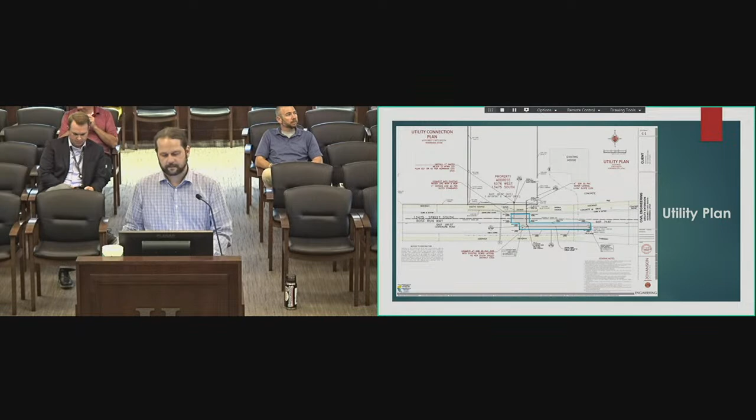The reason behind this request for the extension is due to some unforeseen costs for improvements that have to be done before South Valley Sewer will actually sign off on the plat. So the applicant's asking for an extension of time so they can save up for that money. That being said, staff does recommend approval of the subdivision extension request with the following conditions.

Great, makes sense. Any questions? Nope. For Sheldon or the applicant, if you have any questions, they're here. We will go ahead, if the applicant wants to come forward, provide any additional information. Seems pretty straightforward, but that's fine.

Any discussion from Planning Commission? Seems pretty straightforward. I'm ready to make a motion to approve item 4.1 with staff's recommendation. We have a motion by Adam and a second by Jackson.

We'll go ahead and do a roll call vote. We'll start with Forrest, yes. Daryl, yes. Heather, yes. Jackson, yes. Adam, yes. Preston, yes. All right, that motion passes. Thank you so much for being here.

All right, we'll move on to item 4.2. Good evening, and thank you again. This is a continuation of a commercial development project that the Planning Commission has reviewed previously.

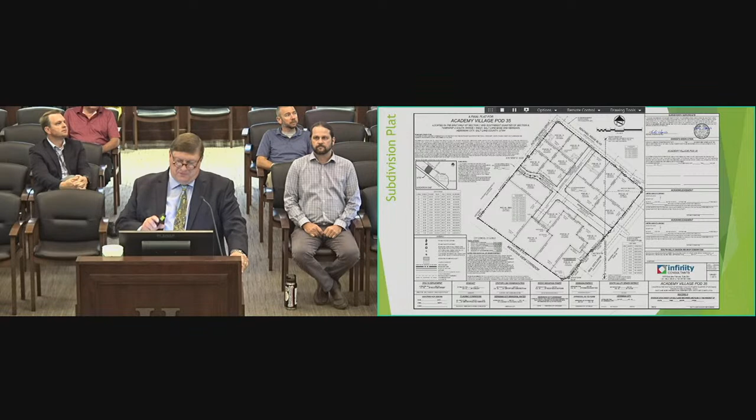As per a prior condition of approval by the Planning Commission, the final building elevations and landscape plan for this project was required to be presented back to the Planning Commission. This is the general location of this project, the subdivision plat that was approved for this area. We're now looking at pods A, B, C, and D in the top corner of this screen.

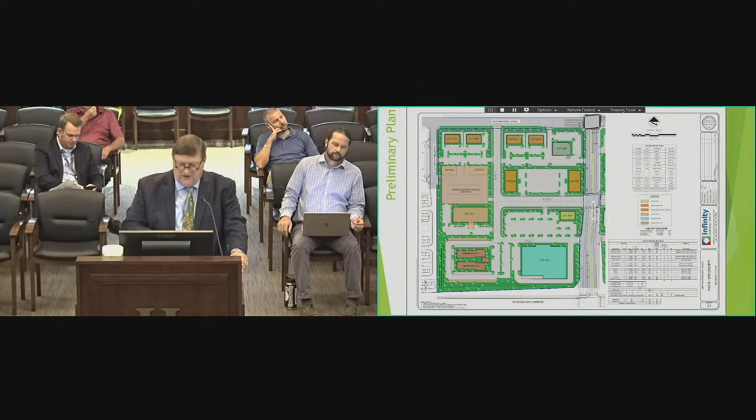Again, this is a commercial project. This was a preliminary plan that does show some residential down here in the corner. As you know, this residential project changed over time, but is still planned for that location. This was the amended plan approved by the Planning Commission. Again, in the upper left-hand corner, you're still seeing pads A, B, C, and D. This is the area we're looking at tonight.

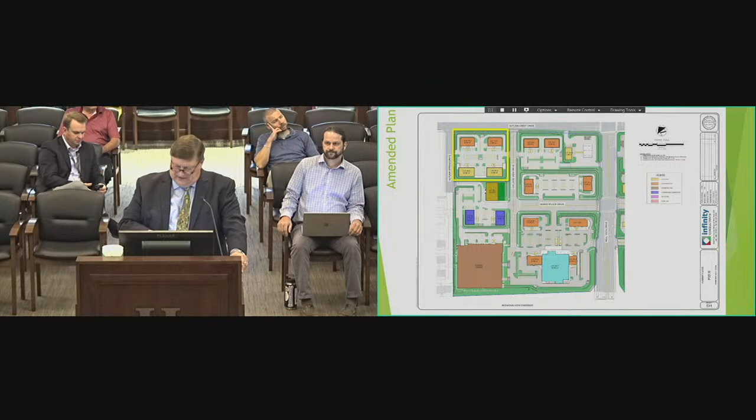In this proposal, currently the plan is to, on pad D, just do parking on that site, which is acceptable and still consistent with the approval of the city. We could potentially see a future pad there, but for right now, the idea is to provide that parking.

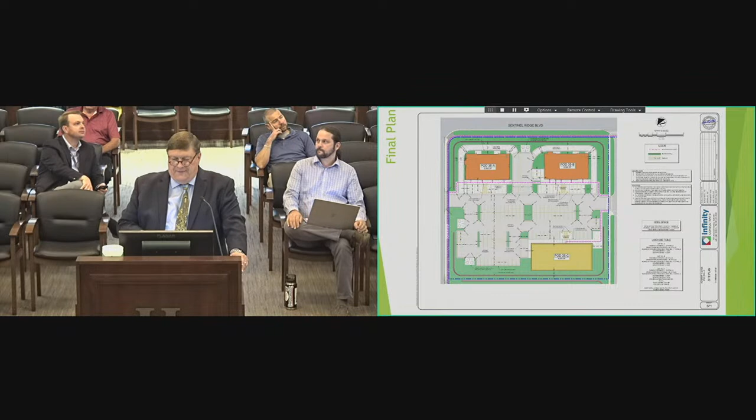Staff has reviewed the landscape plan. It's consistent with the other plans we've been seeing going to the center, as well as the building elevations. I've included all of these, but I'm just going to flow through them quickly. I wanted to have them in case there was any particular question. But again, these are very consistent. You're seeing just variations on the awnings and the combination of materials within the center. And then, of course, all the signage is done separately for each of these tenants as they come in.

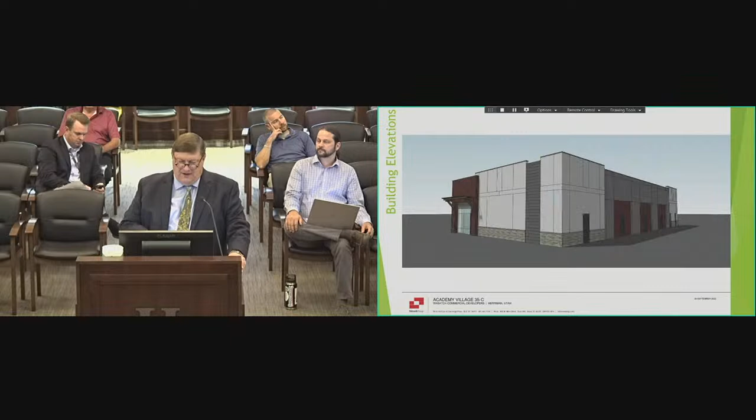The applicant is here online tonight if you do have any questions for them.

We do want to have just a landscape summary table added to their landscape plan. It just makes it easier when we have to do a final inspection; we can go out and simply count all the plants and the types and everything. And also, as the developer has been getting specific users within the center, we had recommended as a condition that we simply update the parking information, the parking plan, to reflect those known and intended uses in Pod 35, just to make sure we're staying in compliance with the overall conditions of approval.

So that was staff's recommendation. I don't know if you have any questions for the applicant tonight.

Maybe one quick question, even for staff: when they do decide to build a fourth pad there with that building, I guess they'll still have to come back to us, and parking and everything will then... Right, because parking will be removed, so when that happens, that will be a future situation for us to work through. Okay, perfect. Which at this point in time, given some of the parking demands we're seeing in our market still, it feels like providing the additional parking is appropriate. Right. Yeah, very good.

Any other questions for Michael? Okay. All right, thank you. All right, the applicant is online. I don't know if there's any additional information you would like to provide to the Planning Commission, but we'll allow you to do that at this time.

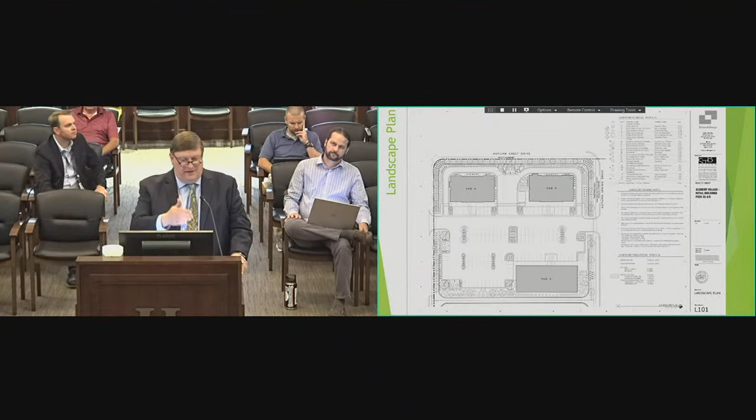Mike, do we need anything official that records that? No, because the lot still exists. And if the developer at any point in time wanted to reconsider and bring back a building D, as was mentioned, we would still need to make sure it meets the parking requirements of the city. The lot is there, but this is the current site plan for Pad D, and it meets the standards. Could be something similar that happened on the Smith's parking lot, right? Down the road, it could happen, but then they'll have to come back at that time.

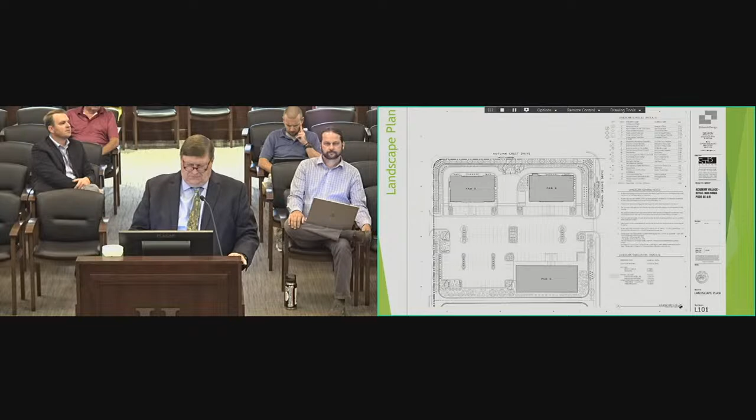Okay, I'll go ahead and make a motion to approve item 4.2, the review and consideration of the final building and elevations and landscape plan for commercial in Academy Village Pod 35. I'll second. All right, we have a motion by Adam and a second by Preston. We'll call for a vote at this time.

Preston? Yes. Adam? Yeah. Jackson? Yes. Heather? Yes. Daryl? Yes. And Forrest? Yes. All right, that motion passes.

We'll move on to item 4.3. Is this one yours as well, Michael?

This is a continuation of a conversation we've had with the Planning Commission previously in a work meeting, for additional signage for an emergency room facility here in the Herriman Towne Center, just north of 134th South. More specifically, this is a sign location near the CVS Pharmacy on the northeast intersection of Ford Herriman Parkway and 134th.

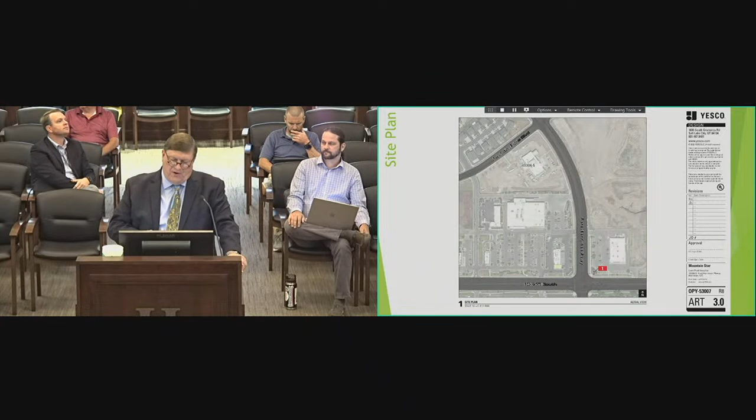As discussed previously in a work meeting, we showed you this conceptual sign plan, which was certainly not the first iteration. They've been working with staff and their own team on how to make sure the general public is aware of the location of this emergency room facility, which is not directly adjacent to 134 South. The Herriman Towne Center plan development and design guidelines allow for what's called a multi-tenant commercial sign, advertising properties and users deeper within the site. This is typical not just for this center but other projects — a planned center sign that allows multiple tenants to share a single sign within a project area. So the request from the applicants is to have the commission review a conditional use application for a commercial multi-tenant sign on this corner.

From the last conversation, there was a concern to have this sign more closely mirror the existing monument sign advertising the gateway entrance feature into the Herriman Towne Center. In response, the applicant has increased the cap size and overall dimensions of the monument to be consistent with the existing sign on 134th, including picking up this recessed detail evident on screen.

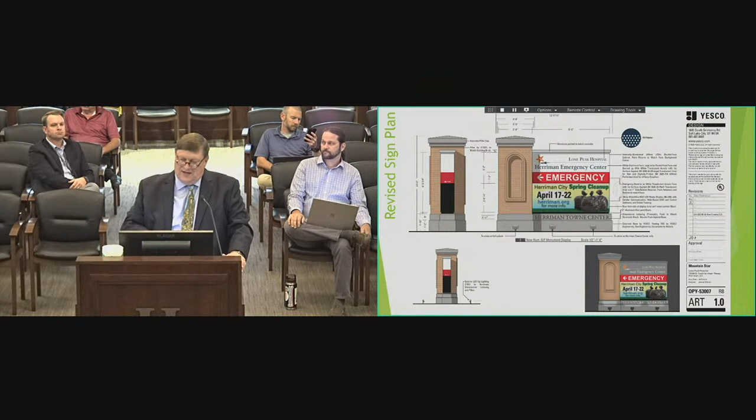This is a multi-tenant sign, so part of it would be static — the name of the hospital group or emergency room owner and operator, and the emergency directional sign itself — while the rest is proposed to be a changeable copy electronic signboard. They just put Herriman City as a placeholder to show that this portion would rotate and change names. This is a developing corner of the Herriman Towne Center, and there's been no agreement made with other tenants yet, but one condition of approval is that we have an operational agreement specifying it will serve multiple tenants within the site, since that's the type of sign allowed under the design guidelines for this project.

For reference, the applicant provided these renderings, mainly to show scale within the site, and also the need to have the sign perpendicular to 134 South so both east and west traffic can see the emergency signage. The sign across the street has a chamfered angle to the street, but if we set this sign at a similar angle, it wouldn't be legible in both east-west directions.

So we've recommended approval subject to these conditions. I briefly discussed this with our city attorney Todd Sheeran and assistant city attorney Matt today, and it was recommended that condition number 2 — where it says the applicant shall prepare and enter into an operational agreement with Herriman City — add language stating that the agreement must be acceptable to the city attorney. We want to make sure the city attorney reviews and agrees to it, and that the operation of this sign meets the standards and intent of the Herriman Towne Center design guidelines, in that it needs to advertise for multiple tenants.

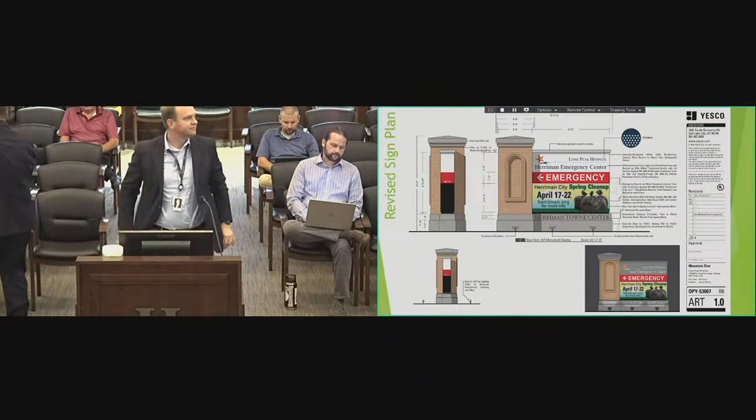I know a couple of us had a question as to the way this is laid out. It looks like the column should be on the north side, where the renderings we had on the next slide... if you go down a slide or two, can somebody help us with that? That one. It looks like those are backwards from what the sign was, because the emergency directional sign, basically the question is, where's the column? Is it on the north side or the south side of the sign? Maybe you don't know.

To me, I would actually flip this. That's what I'm thinking, it should be flipped, but I think they did this reversed. Yeah, we were trying to anchor the column out on the street, but obviously the directional sign for the emergency is going the wrong way, so we would fix that. But that's the question: is the column on the south side or the north side of the sign?

Yeah, I think it's on the north side. It should have been flipped, on the parking lot side. So that image should be flipped, that seems more consistent with what we've got on the other side. Yeah, and to me, that makes more sense, because it feels a little heavy the way it is. The column should be further down the other road, not at 134, in my opinion. I just want to clarify.

Anything else you'd like to present to us today? No questions you have for me, Planning Commission? Thank you for entertaining this. I think the emergency room's been open for about 6 months, and we're seeing a good pickup in volume, but obviously seconds and minutes count for anybody in an emergency. So having clear direction of where it is is imperative to the health and well-being of the community, so I think this will help.

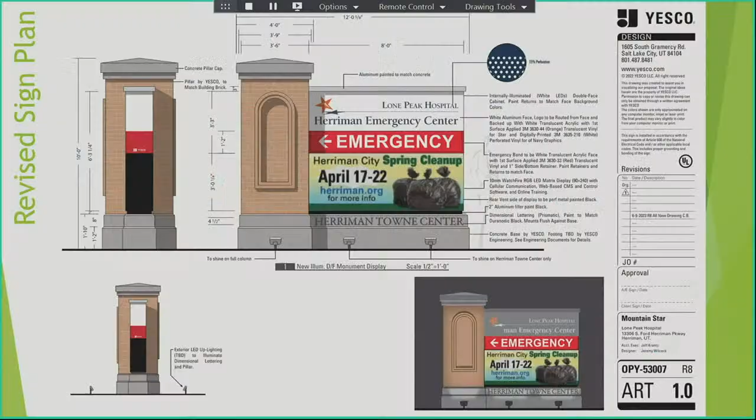You know, I do have one question. Just want to make sure, can we go back to the last slide? Keep going. One more, this one. Okay, so on the screen on the left, it shows the Yesco sign. Is that going to be visible from the street on either side, or will that be in the back facing CVS? I do not intend to have the Yesco sign on there.

That would just be right, the upper right or upper left. My thoughts are, unless, with the column on the north side, that would be visible looking north. No, that'll be street side on 134, south. Yeah, you'll see that. You will see that when you're on 134, or excuse me, when you're on 56th, whatever that street is, 48th.

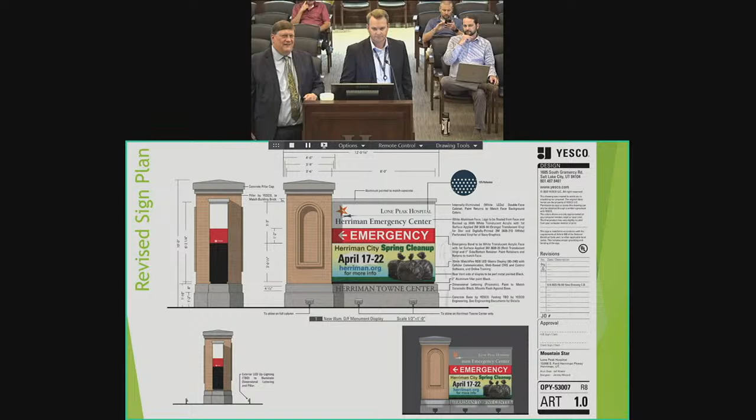The one that enters in by the entrance there. Anyhow, when you're looking north, you will see that. Yes, this is how you will see that when you're looking north. Heather, maybe you can help me understand your concerns. I'm just wondering, because visually we want it to look really nice and match the other side, right?

And I don't know, if I drove past that and it was visible from the side, that we're accomplishing what we're intending to do. Well, my thought is, either way, you're going to see it one way or the other, whether driving from the north or from the south. Right, but it's whether you're traveling down the road from the hospital that you see that Yesco sign. No, and you wouldn't.

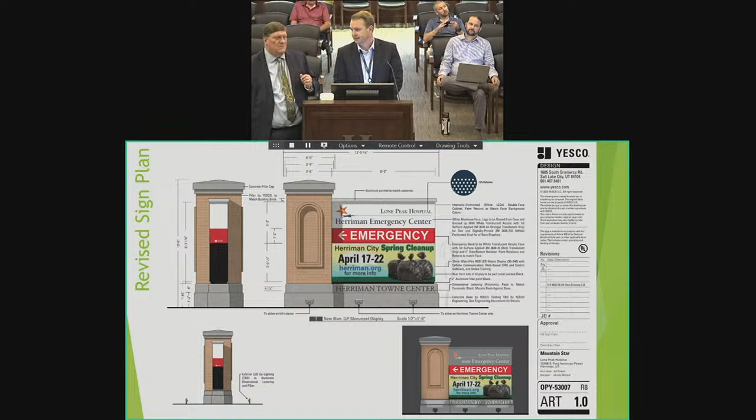My personal preference is to have the column on the street side on 134, because it acts as a gateway, and it more closely resembles what's on the other side, which has the largest column on 134. Well, my thought is simply to have less interference with the word emergency. Yep, that's my thought as well, that's why I like it on the left.

Are you okay if the applicant makes that choice, or do you have a strong preference as a body? I personally like to keep it away from the intersection, the big part of the sign, so that's why I'm saying to the north. Sounds like that's totally a safety thing. I'm fine either way. My preference would be okay.

But I don't think from an aesthetic standpoint you're going to be able to match the other side a whole lot anyway, just the angle and everything. No, but when you look at the space of the whole intersection, you're still going to register that the larger column is closer to 134 on the existing side, and then the other as a gateway as well.

Would being smaller make it feel more balanced? I don't think it's going to matter. Well, it's going to feel very off balance if you do the opposite, but whatever they think is going to work best. For me, I think the balance is having that on the north side, but again, that's just our preference.

Everybody, it sounds like we've got a few differing opinions here. Maybe we should just have the applicant tell us how they want it, and then we agree. However the applicant wants it, we can make a motion accordingly, and then you can vote accordingly.

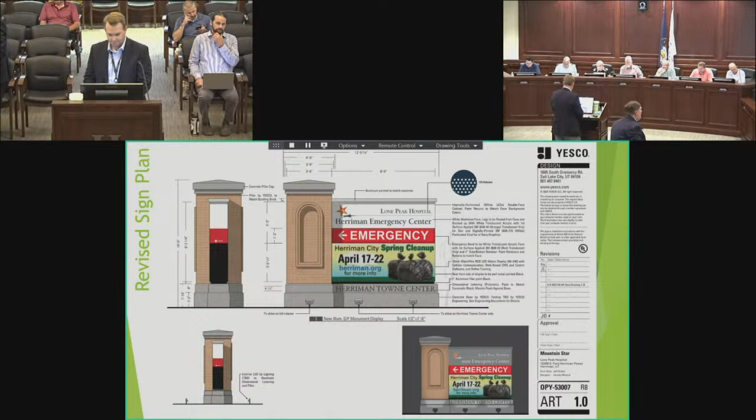With that, if you go to the motions, I'll make a motion. Yeah, you can have a seat then. I think we understand your position. Yeah, you prefer on the north side. Thank you, and I'll just put it in the motion so it's clear.

I'd like to make a motion to approve item 4.3 with staff's recommendation with an adjustment. Destiny, if you can slide it forward so I can see the recommendations. There we go. With an alteration to number 2, to say that the applicant shall prepare and enter into an operational agreement with Herriman City that complies with the city attorney's requirements. Acceptable to the city attorney? Correct, acceptable to the city attorney.

And then an additional, what would that be, 6th item, that says the column will be on the north side. Could you clarify on number 1, the color of the brick as well? That number 1, the recessed design and brick column shall match the color and detail of the existing Herriman City Town Center monument.

Thank you. All right, we have a motion by Adam, and I'll second that, a second by Heather. We'll do a roll call vote. We'll start with Preston, yes. Adam, yes. Jackson, yes. Heather, yes. Daryl, yes. Forrest, yes. All right, that motion is approved. Thank you very much.

Okay, we'll move on to item 4. Well, before I move on to item 4.4, it is up for a public hearing. I don't know if any of the other ones were. So before we jump into item 4.4, I would like to read the requirements for the public hearing, since the remainder of our items are on for public hearing.

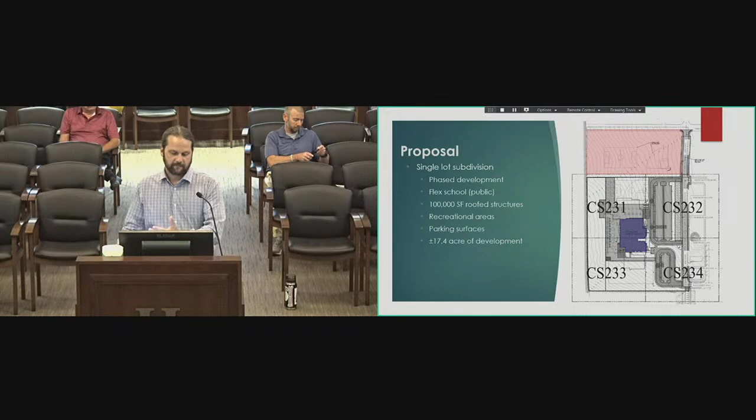It's currently zoned A1-43. What they're proposing is a phased development. The initial development will be the school area itself, about 100,000 square feet of structure, with some turf areas, recreation, parking, etc. The overall development of this particular site will be about 17 acres developed out of the 27 acres.

Here's the plat they're proposing, so it's a single lot. Again, in the dark gray areas you can see the areas they're dedicating for right-of-way improvements. The top there will be 6400 West, and to your left here will be 13800 South.

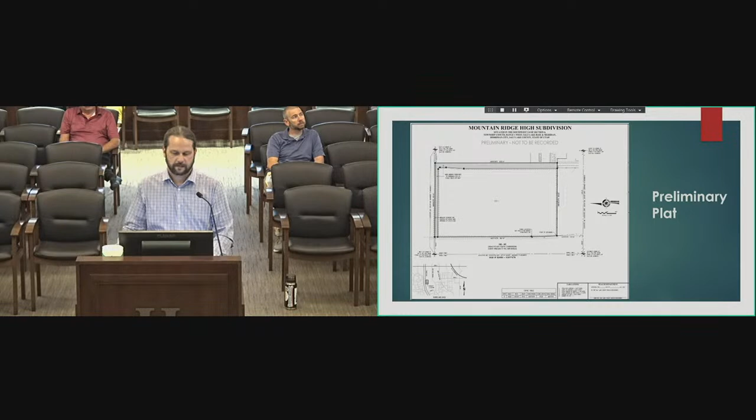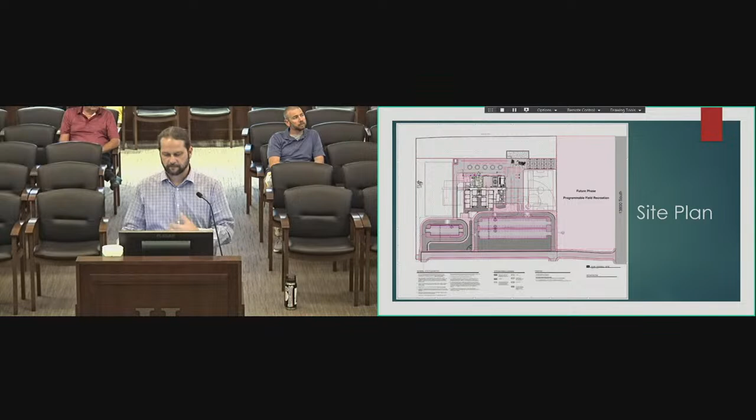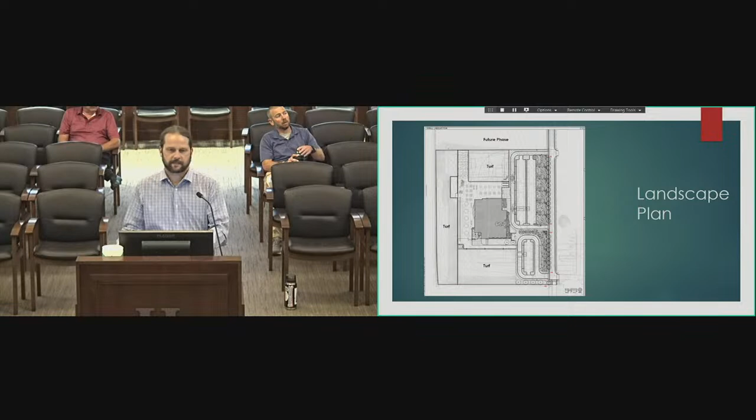Landscape plan here, and as we've discussed earlier in the work meetings, there are certain regulations the district doesn't have to comply with. Therefore, as far as landscaping goes, we don't have a lot of say on landscaping, building placement, architectural design, etc. However, on the sections where they're dedicating for the right-of-way, those park strips will have to meet city standards for landscaping requirements, which they have provided and do meet those standards.

Again, a few things to look at: for zoning, the base zone does meet those requirements. Public schools are a permitted use in the A1 zone. Engineering did have some concerns that need to be addressed as well, but these are considered minor concerns at this point.

So looking at the compliance, the proposal, as mentioned previously in the work meeting, 13800 South, part of this development, the city is working with the school district now to try to determine what type of improvements they want to see along 13800 South. Another issue that needs to be resolved is we need to see landscaping for these frontages, for the park strips, etc. And then on the plat, they just have to change Cannon Drive to 4600 West as per the county and city until they can officially come up with a name. I guess the school themselves get together and name their streets. Once that's done, they can submit an affidavit with the city and get that changed.

That being said, staff does recommend approval with these following conditions. Do you guys have any questions for me?

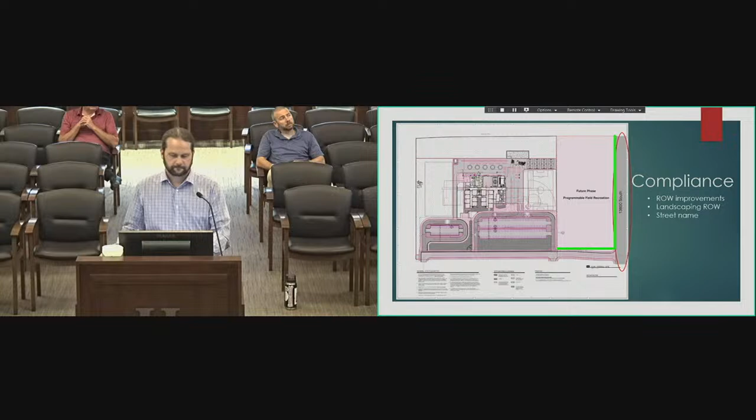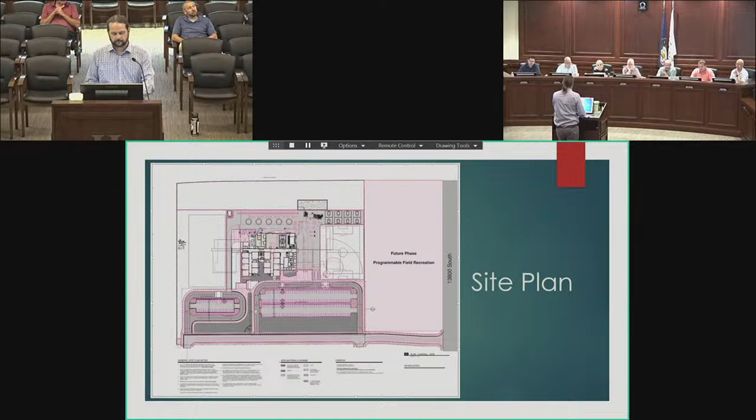Just a quick one to confirm: where they have turf west of the school, can we specify water-wise landscaping? As they go up that steep hill toward Mountain View corridor, on the west side where it says turf, it shows a nice hillside there. Can we regulate that? No, per the state, we can't regulate any of the landscaping.

So they can use our water. Obviously these will all be turf grass, and unfortunately we don't have the authority to regulate landscaping for a school project. That's landscaping, building materials, fencing, anything on that site, we can't really regulate.

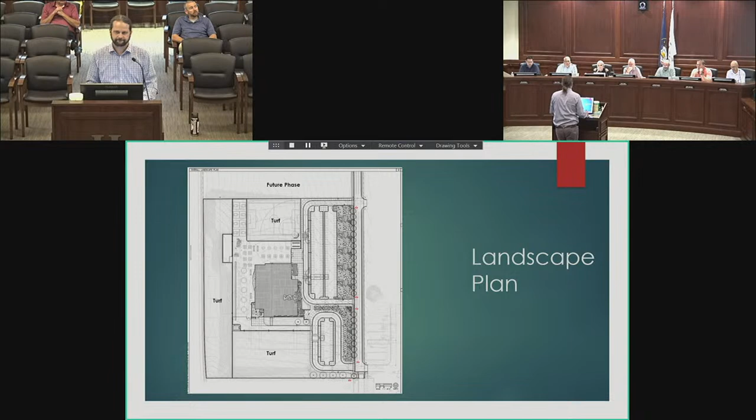Sheldon, has there been any study that tells us where the students are coming from? I haven't seen any myself. I'm not certain if engineering has already looked at that. The applicant is here, I'm sure they can speak on that behalf. My thought process is it appears that most students would more likely come from the Riverton side, the east side, as opposed to the Herriman side west of Mountain View, which creates a safety issue of how do you cross over Mountain View to get to the school.

Yeah, I think that's something we can ask the applicant about, that's a good question. Sounds like they're here. We can hold that question for the applicant.

Sheldon, the stub outs that come off of Wilson Peak and whatever the other street is, where do they go? That stub out, what street does that tie into? Can you go back to the one that showed the overall current phases beyond that? There you go, yeah, so it's Watchman Way that connects into there.

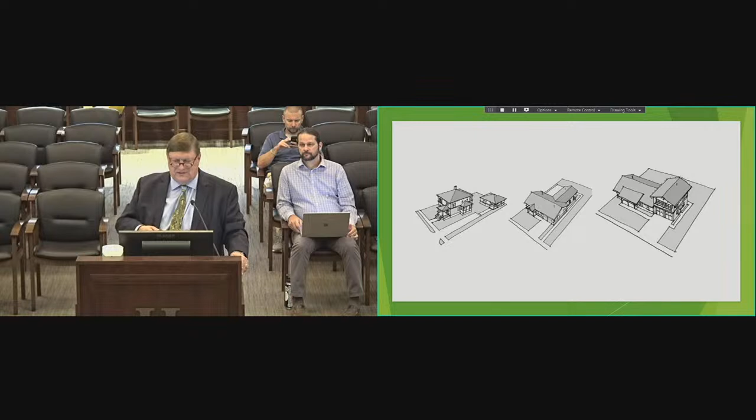There was some clarification in the auto mall zone that we wanted to correct, just a technical correction. Again, just like last time, you can approve the proposal with or without additional amendments. The one thing we mentioned in the work meeting is that if you make a motion to forward this to the city council, we want to remove all references to recreational vehicles, because that's in favor of your next item. They used to be one omnibus bill, but we split them out, expecting the council may also want to study the RV vehicle portion in greater depth versus the other technical corrections we're proposing.

Any questions about 5.1? This is a public hearing, so... and we are the applicant, so.

I do have a comment on double fencing. In my neighborhood, I have people that sit really high and people that sit really low. If someone's building a house on the top, and the person below already has a fence, if the person on top builds a fence, isn't that kind of double fencing? Could we have an exception for situations where it could create a safety hazard for those living on the upper lot?